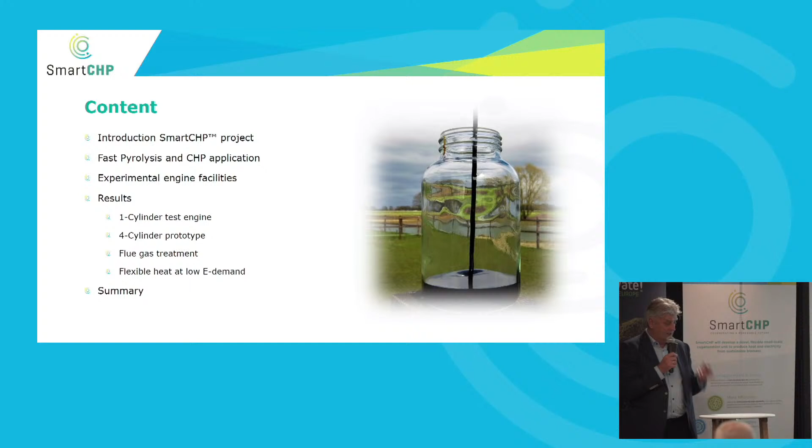So first, a short introduction on SmartCHP. What we would like to develop, and that's in fact the main objective, is to develop a novel, flexible, small-scale cogeneration system. A small scale means, let's say, 100 to 1,000 kilowatt electrical, producing heat and electricity.

What we also realize is that fuel cost is a major cost component in such a system. That's one of the reasons we would like to use untreated fast pyrolysis oil, just crude pyrolysis oil as it is normally produced, and use it directly to minimize fuel cost. This pyrolysis oil is produced from all kinds of different biomass resources. It can be agriculture, it can be woody, etc.

A big advantage is what we use, a so-called compression ignition engine, normally known as a diesel engine. The big advantage there is that you have relatively high efficiencies, and moreover, you can have very fast startup and very fast load changes.

So as mentioned, we foresee commercial application in this range from, let's say, 100 to 1,000 kilowatt. What we also would like to achieve is a high heat to power ratio, or to be very flexible in the output, having more or less heat compared to the electricity.

Well, schematically it's shown here. We start with non-food biomass, RED 2, RED 3 compliant biomass. We make fast pyrolysis oil, and this fast pyrolysis oil, FPBO, is fed to the engine. Of course, we need to modify this engine. Then the flue gas from the engine is sent to a boiler, and we can add some additional pyrolysis oil if needed, if we need more heat.

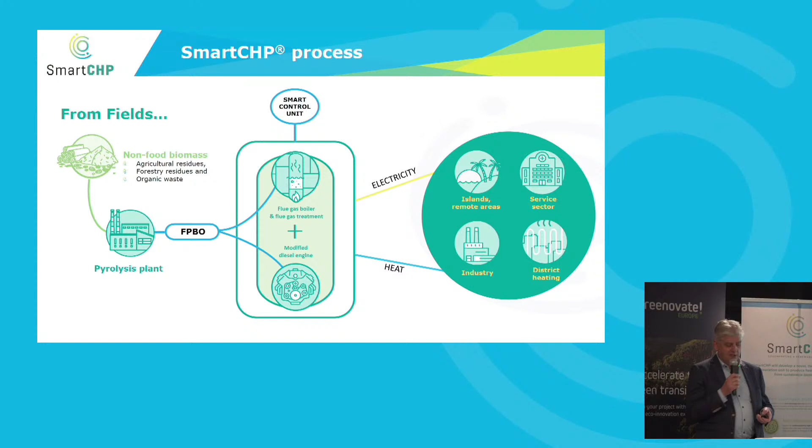That should provide the information for a commercial scale system. Besides the technical aspects, we have some assessments on biomass availability, market assessment, techno-economic assessment, but also sustainability, socio-economics, and policy. That will be covered later in this program.

I will focus more on the development of this prototype.

That's just as an introduction to SmartCHP. We will hear more about it later on. And I would like to continue only with fast pyrolysis and the application of fast pyrolysis oil in the engine.

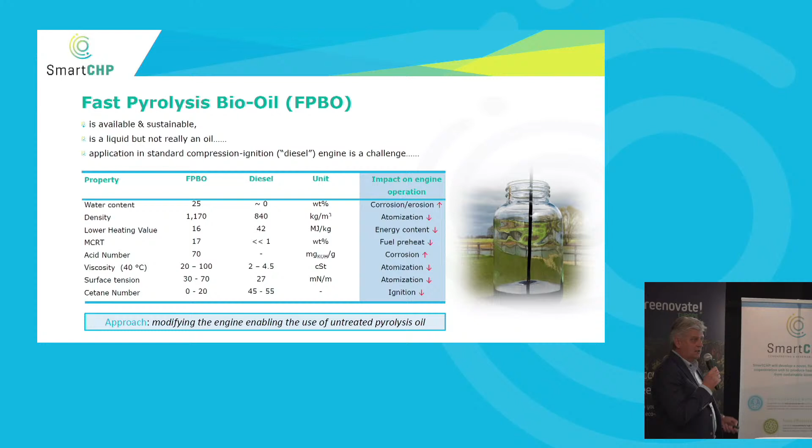So we modified the engine. We have different facilities at BTG, what we call a 1-cylinder research engine and a 4-cylinder prototype. Some properties are given here.

But to be able to run the engine on pyrolysis oil, we need certain modifications. So what we did, we increased the compression ratio, which means a higher temperature at the end of compression, so you can ignite the fuel.

That's also the reason we did some air preheating. If you start with a higher temperature, at the end of compression the temperature will be higher, easier to ignite. We did a little bit of pyrolysis oil preheating to lower the viscosity, but it's limited, otherwise it will polymerize. And a difficult one is having a corrosion-resistant fuel injector to be able to run continuously.

And of course, in the end you need to have low emissions, and that's the reason we added a flue gas treatment. It's a kind of add-on to the system, but it allows us in the end to comply with European emission limits.

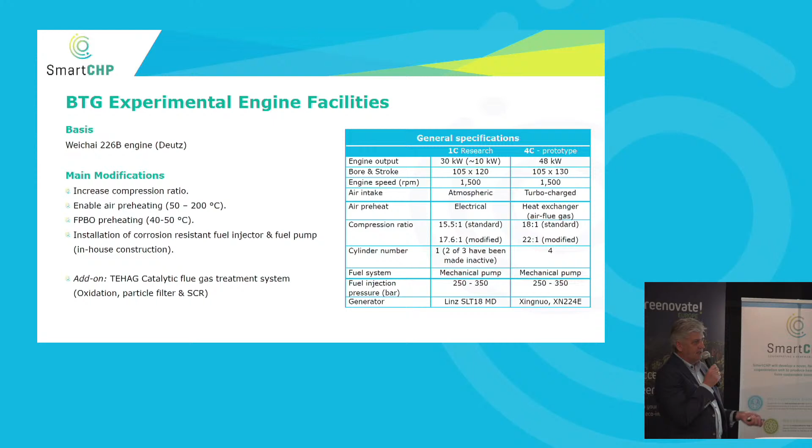This is the 1-cylinder test engine. In fact, it's a 3-cylinder engine, and 2 of them are made inactive, so only 1 is running, and you only have to install one new fuel injector and one modified fuel pump, etc.

We did a lot of experiments. I won't show you all the results of all the experiments. There are some public deliverables explaining more on the results, but of course we looked at different process parameters.

Just looking at the pyrolysis oil, it's not treated. The only thing we do is filtrate it, at least to avoid particles in the oil. Very often we add a little bit of ethanol because that makes life a little easier for us, it's the lowest viscosity and it's easier to feed it. If there's a subscript like 10, it means 10 weight percent of ethanol has been added to the pyrolysis oil.

We looked at different process parameters, and at pyrolysis oil from different resources like pellet crumble, sawdust, miscanthus, olive residue, and also a fraction of pyrolysis oil called pyrolytic sugar. We also used it in the engine.

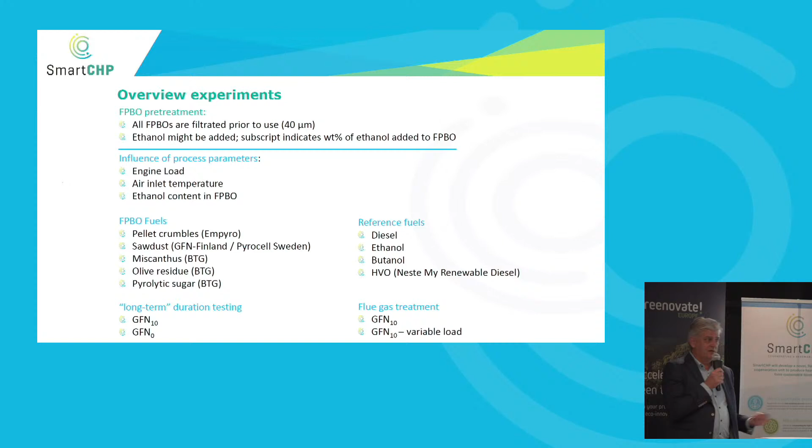And we compared it to reference fuels: diesel, but also ethanol, butanol, and hydrotreated vegetable oil. It's easily available and just for comparison. The long-term testing we did with what we call GFN, the oil from Finland, which we can easily get, so a lot of long-term testing was done with oil from sawdust.

Just some results. What you see here is the different fuels, and these are pyrolysis oils, and these are reference oils. Of course, if you look at the mass of fuel you're injecting, it's much higher with pyrolysis oil because the heating value is much lower. That means you have to inject 2.5 times the mass of diesel, because otherwise you have less energy entering the engine.

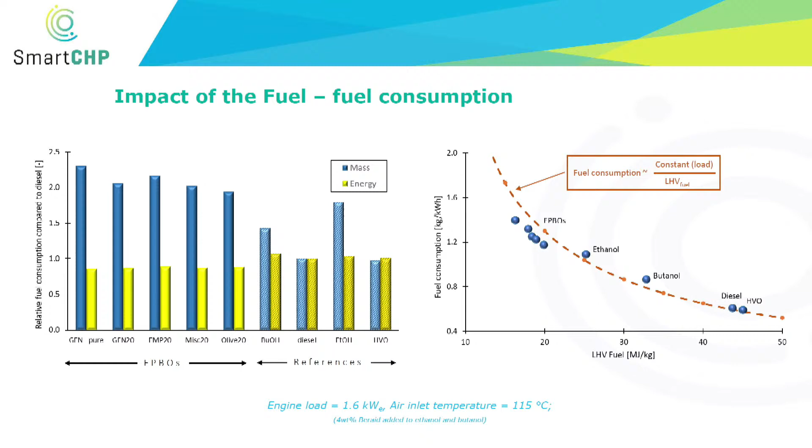So that's quite normal. The same you see for ethanol and butanol, because also the energy content is lower. The yellow one is on an energy basis, and it looks quite nice because diesel is set to 1. If we compare on an energy basis, we consume a little bit less pyrolysis oil. Of course that's very good, but I also have to admit the engine has been optimized for running on pyrolysis oil, so conditions are suboptimal for diesel. But basically it's roughly the same.

And what you see here is what you would expect. If you change the heating value of the fuel, you get this kind of line. The red line means it's the same energy efficiency. But what we see normally is the energy efficiency on pyrolysis oil or diesel is roughly the same.

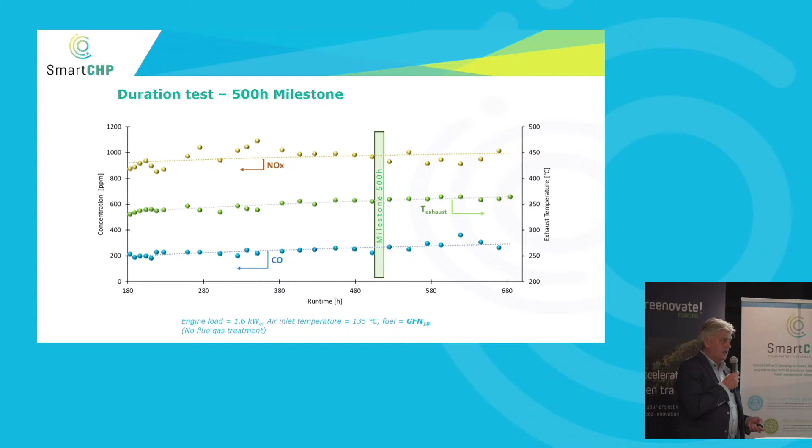We continued this testing also for flue gas treatment, etc. So this injector we used here was operated for more than 1,000 hours on fast pyrolysis oil. I think that's a quite good result, and a major result from this project.

So this is part of the 4-cylinder prototype, the 4C prototype. And this is also the emissions directly after the engine, so without any flue gas treatment. Again, we are just comparing diesel and pyrolysis oil. As said, the 4 cylinders are optimized for running on pyrolysis oil, not optimized for running on diesel.

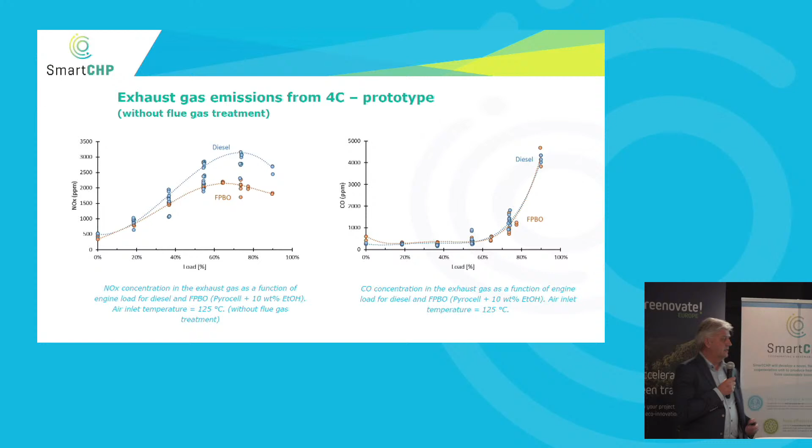Soot emissions we do not really measure directly. What we measure is opacity of the flue gas, and it's a little bit indirect. It's not an absolute guarantee that the particle emissions are very low, but it's the only analysis method we have so far. Actually, at the moment we are trying to do particle measurement, but the results are not yet available. What we see again is that for this engine, this is almost 100%.

The opacity remains very low. It would be an indication that soot emissions are quite low with this system, but it's not a guarantee.

Here again is the electrical efficiency of this engine. According to the engine supplier, it should be 32%. In the project we were hoping for 40%, but if we start with an engine which is designed for 32%, we will not be able to go much higher.

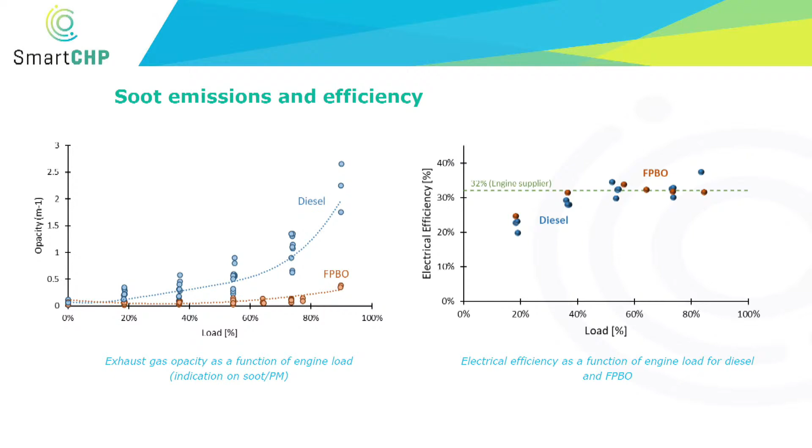What you see here is diesel and pyrolysis oil as a function of the load. We are around 31 to 33%, somewhere in that range, if we run at sufficiently high capacity. I think the conclusion here is that, apart from the absolute value, there is hardly any difference if we run on diesel or pyrolysis oil, and I think that's quite nice, quite good.

Well, of course, as mentioned, the emissions are quite high without any flue gas treatment, so we need a flue gas treatment.

So it's the engine, we have the flue gas, all the measurements so far were from this point. Then we have an oxidation catalyst to get rid of the CO and the hydrocarbons, and it's also a particle filter. After that, AdBlue is injected, the ammonia solution. We have catalytic DeNOx, and then we should have the clean flue gas, at least it should comply with the regulation.

Here you see some results from the 1-cylinder engine at fixed conditions, where we also needed at least 100 hours of operation. This one was running for 150 hours without changing anything. After the start, the red one is CO and the blue one is NOx, both were somewhere in the range of 92 to 96% conversion.

And the emissions are within the limits. We think this system for the 1-cylinder engine, the smallest one from TEHAG, is still a little bit over-designed for our research engine, and that would also result in these very high conversions. But the catalyst remained stable.

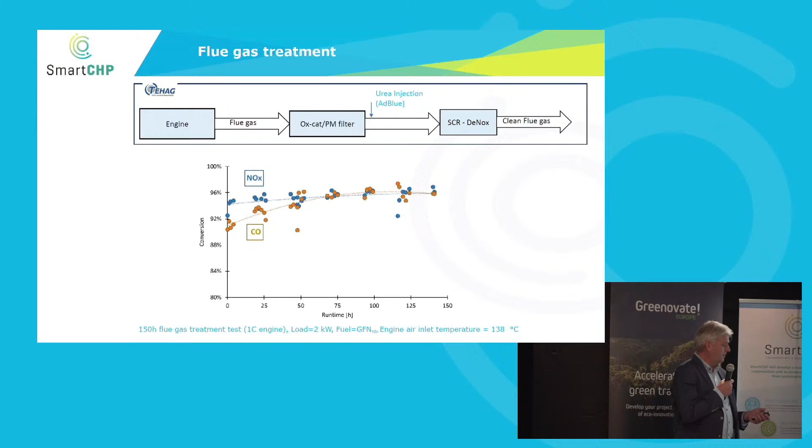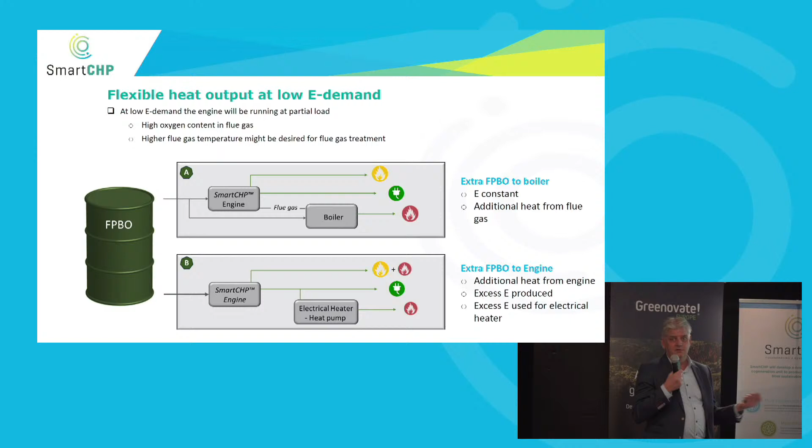What appeared here, and honestly, we're still not 100% able to run the boiler in this setting. It's very unstable, hard to ignite, and so we had a lot of complexity. We're also running the system with electrical heaters, which we have in the lab. It's much easier and simpler to operate, and changes in load or output are much more flexible.

So I think in the end, for the next system to implement, it will probably be more like the electrical heater system than the first boiler-based one. But that's also an outcome of this project.

Anyhow, at OWI in Germany, they were running the boiler standalone with pyrolysis oil. That works, but this combination, this integration, creates a lot of complexity, so that was not fully successful.

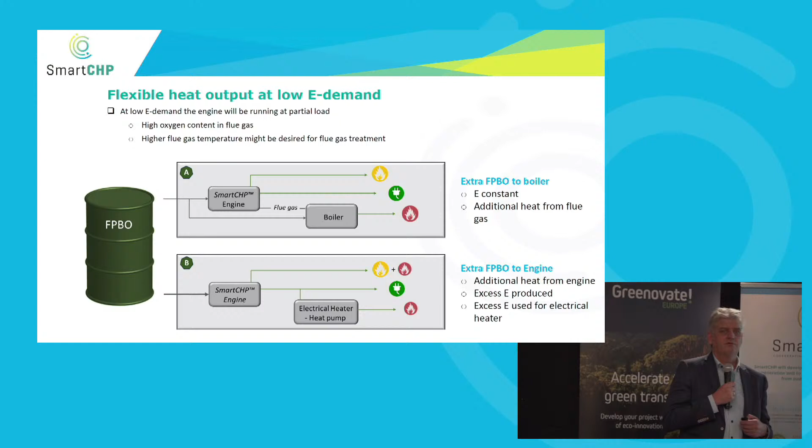To summarize: we were able to modify the combustion engine to really run on pyrolysis oil as a fuel. We also saw that even changing the origin of the pyrolysis oil doesn't have a major impact on running the engine, as long as the oil is more or less homogeneous, or treated. We cannot run it as a two-phase oil.

We ran the one-cylinder engine for more than 1,000 hours, and the prototype for more than 100 hours. We saw very limited fouling, so we were very happy with this pump and injector. The solution we have now does work for this system, and that took quite a while.

Flue gas treatment is effective. At least we can stay within European and Dutch limits, but as mentioned, we did not fully achieve the performance indicators we defined ourselves.

Another point: if you compare diesel and pyrolysis oil, it's very much the same. If you look at electrical efficiency, that's also quite good—in that sense there's no derating. It's just hard to run at 100% engine capacity.

Lastly, from a technical point of view, if you want a high heat-to-power ratio, it's easier to feed the engine with more pyrolysis oil, generating more electricity and using that for heat generation, than injecting pyrolysis oil additionally into the flue gas. That creates a lot of complexity and is difficult to control, so I don't think that's the proper solution in the end.

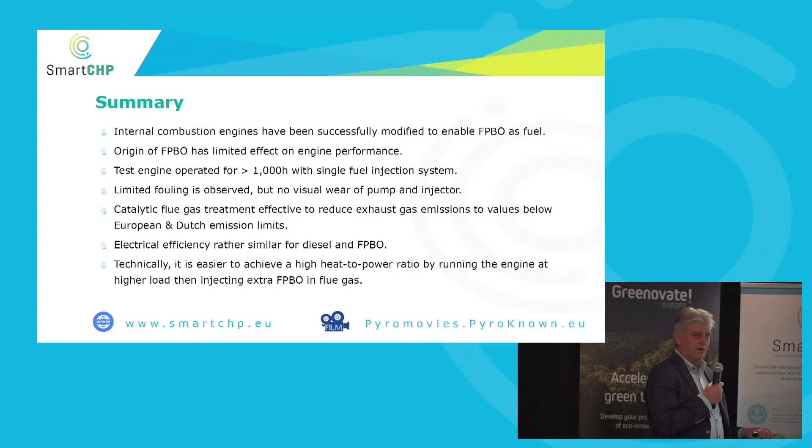There's a website with movies showing the engine running, so you can check that out. And that brings me to the end. Thank you.

More or less, I will talk about the Blaze and UNIFHY project that are similar, with smart CHP, project with different technology, but the things in biomass are more or less similar. First of all, the status of the CHP. There is a status that we have together for the biomass availability, but there is also status on CHP that we checked a little bit together. There is a deliverable in the Blaze and also Smart CHP website that I suggest you read about biomass availability and so on, CHP status.

So more or less, this means that the CHP is mainly done by steam turbine, or combined cycle, at a bigger size, not at this scale of a Smart CHP. There are also small operating hours, 3,000 operating hours electrical and 2,500 thermal. So also this is not enough. I want to do a high efficiency, I want to make a better efficiency use of my energy. And after, I have to plan to have a system that is operating more than 3,000 per year. So this is also an issue. The cogeneration electrical now is on average 40% electrical and thermal, so there is more thermal needs. It's mainly used for space heating, process heating.

Okay, and we saw the countries now that use mainly CHP. And in smart CHP, you see the countries use mainly biomass. Always Germany, Italy, UK, Sweden use biomass.

Instead, here are countries that use mainly CHP and biomass. Poland also uses CHP, and of course there is also Netherlands among the others.

So this is more or less regarding the fuel, mainly used natural gas, but biomass is increasing. So there is a lot of use of biomass for CHP. Below 1 megawatt electric, mainly biomass combustors are used.

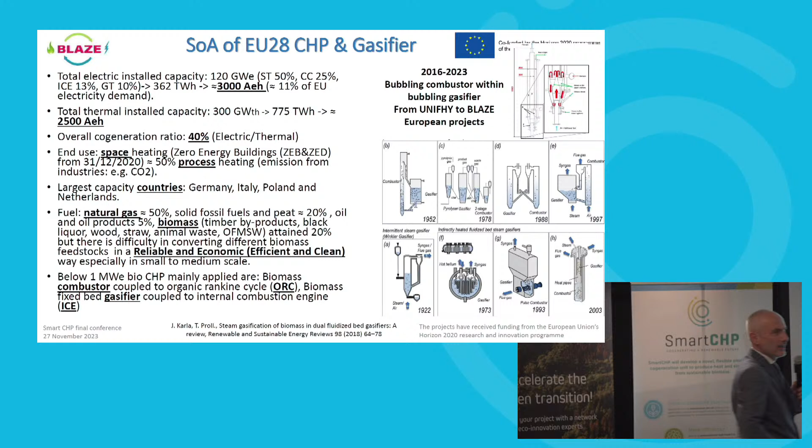That for us is more compact, in order to allow the application of the reactor for small to medium sites. So there is the idea of this biomass, low-cost, advanced zero emission, small to medium scale integrated gasifier, fuel cell, combined heat and power plant.

And here instead we always use waste biomass. We use this double bubbling gasifier. We produce a syngas to send to the SOFC, to produce heat and electricity, more or less.

So there is also the problem that maybe for industrial use we can increase the annual operating electrical and thermal operating hours. That is good. We can arrive at 7,000 hours.

If you have some industry that uses continuous electric and heat, but of course here the price is a little bit low, and there is also the problem of the price of the feedstock.

The feedstock price is not 60, 100, but we saw in these days also 300 euros per ton in the past months, when there was the war in Ukraine.

So, what is the target of Blaze? To reach 90%. So with the SOFC, instead of internal combustion, we can also reach maybe 50% efficiency, overall efficiency. The SOFC also has a greater stack efficiency.

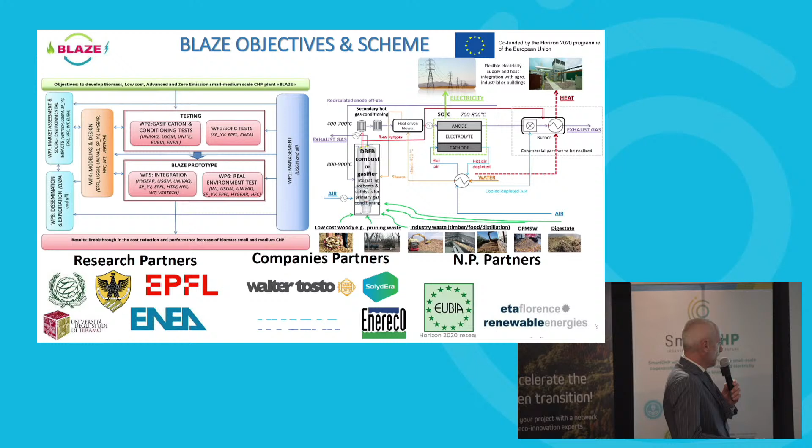Also here there are some partners, research centers and companies, from some European countries. And also here we have some categories of feedstock.

We are mainly interested in gasification, and so it is most important to consider the ash melting point, in the reactor, in order that it doesn't melt in the reactor.

So there is also, if you see the Blaze Deliverables that are open, you find all this data regarding all the different melting point temperatures for the different feedstocks that we checked.

Of course, there is the problem of the cost that we checked, also in order to harvest this biomass, because with the Smart CHP you also have a good option.

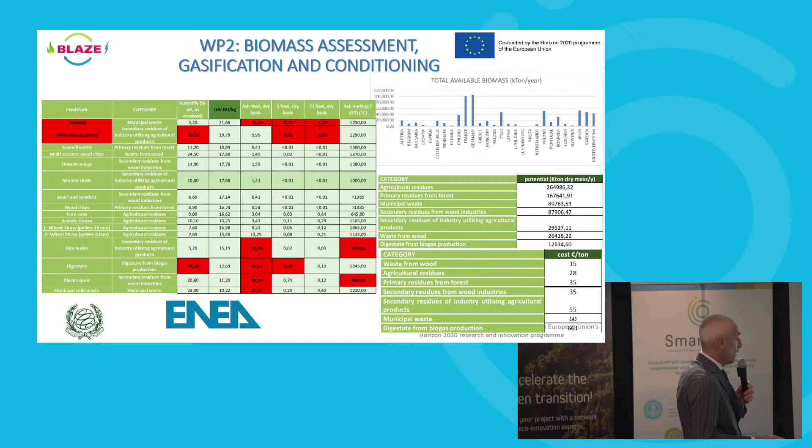Instead of having one big plant where all the biomass arrives, and then sending the pyrolysis oil to the small CHP, here instead we have to take all the biomass to the gasifier.

After, there are results about the primary conditioning, the conditions we find within the reactor, mainly made by, for example, calcinated dolomite, olivine, and so on, in order to decrease contaminants.

This is the lab of Enea, and there are results about the decrease in contaminants for this primary conditioning, using instead of natural sand also calcinated dolomite and olivine.

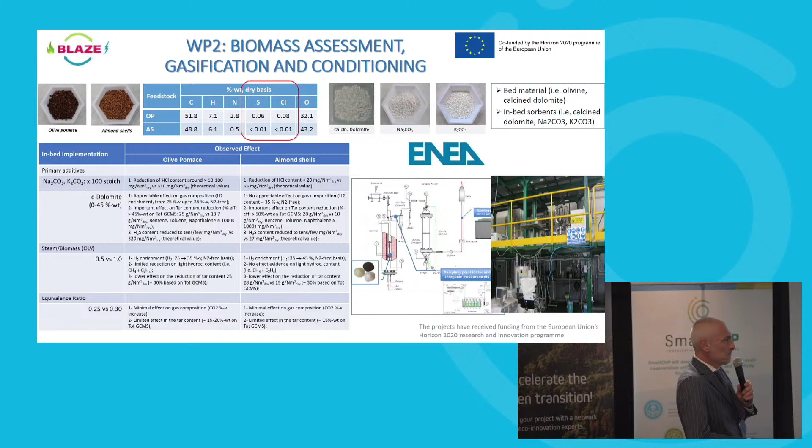The best result is around 50%, an additional percentage of decrease.

Also, we put here catalysts inside the filter candles, ceramic filter candles. This is a lab scale setup, in order to decrease the content of tar and to avoid particulate emissions. These are the results.

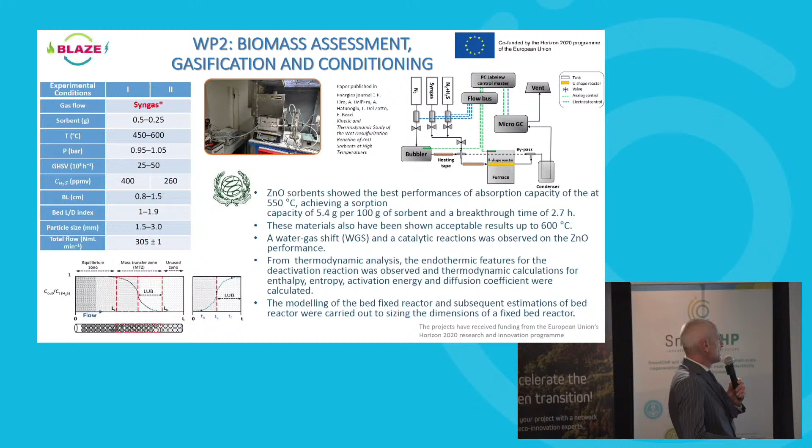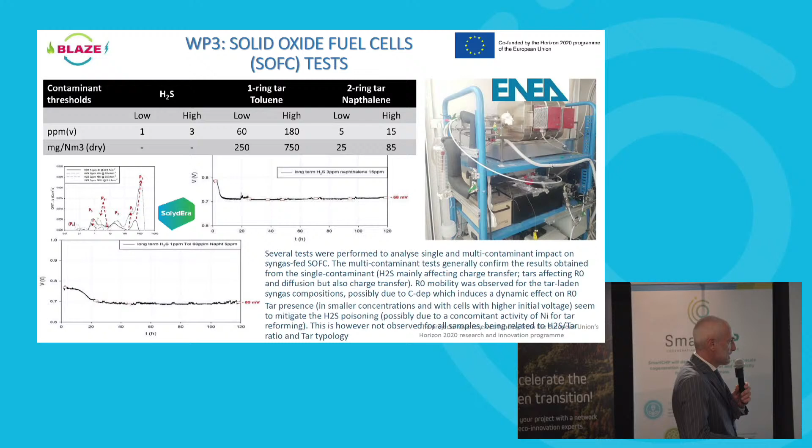Work package 3 is the solid oxide fuel cell. There are many tests on the button cell, a few centimeters of cell, in order to understand the process and what happens to the different contaminants. We send hydrogen first, with a blank, in order to understand, then we send CO, then CO2, then CH4, and then together, to arrive at the different syngas evaluations composed of hydrogen, CO, CO2, CH4. We also take two tar representatives, toluene and naphthalene, as the target.

More importantly, different analyses were made by EPFL within the stack. Within the stack we arrived at more than 2,000 to 22,500 hours of operation. For example, with ppm of H2S, we had 3,700 hours of operation, and also with toluene and naphthalene and so on, and with HCl, we saw some phenomena that are also different from the button cell to the stack. But in general, we found the right limits for the ppm of H2S and HCl, and so we dimensioned the hot gas temperature sorbent for that.

Regarding modeling activity, we modeled in CFD the double bubbling gasifier, and we modeled in CFD the filter with the catalytic filter candle. The problem is we also need to push the gas—it's not an internal combustion engine, so we need to push the gas. In order to do that, we had to develop a steam-driven blower to push the gas without oil, with the gas sealing here and here—a complicated blower.

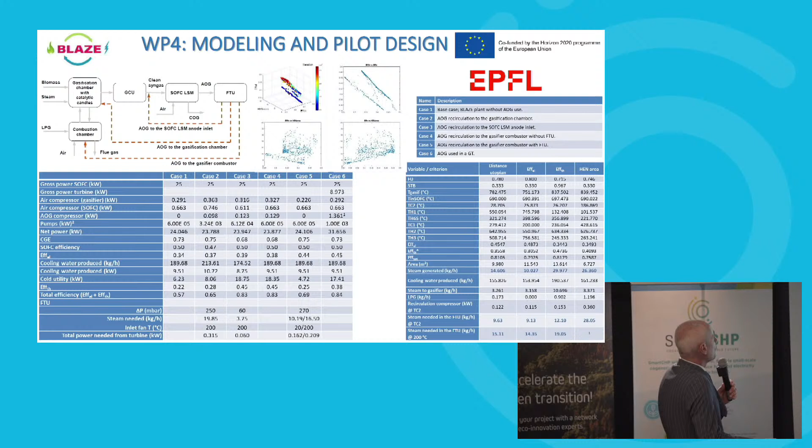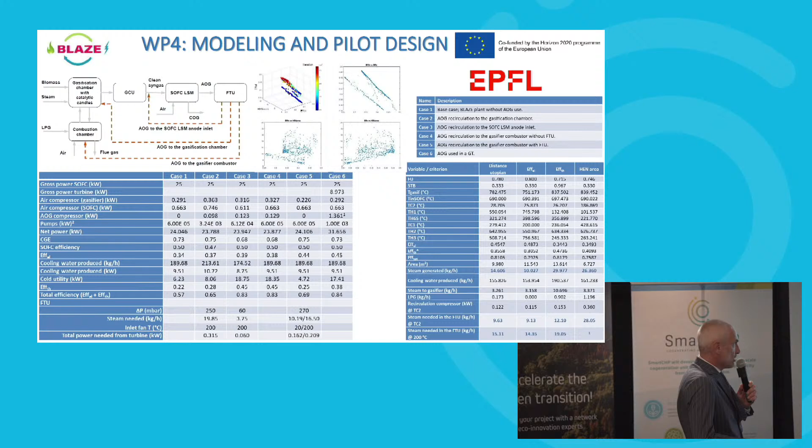Regarding the modeling, we had more or less 40,000 configurations in Aspen. We did a Pareto analysis of the different types of configurations to understand what could work, considering only 3 main operation modes of the plant. We analyzed that the anode off-gas to the gasifier combustor was the best one; the others were not good. But these are just 3 main options—there's a very different combination of heat exchangers and different flows that can be managed and configured. So we had more than 40,000 configurations analyzed, taking into account the best electric efficiency, thermal efficiency, and heat exchanger network, with reduced heat exchanger network area.

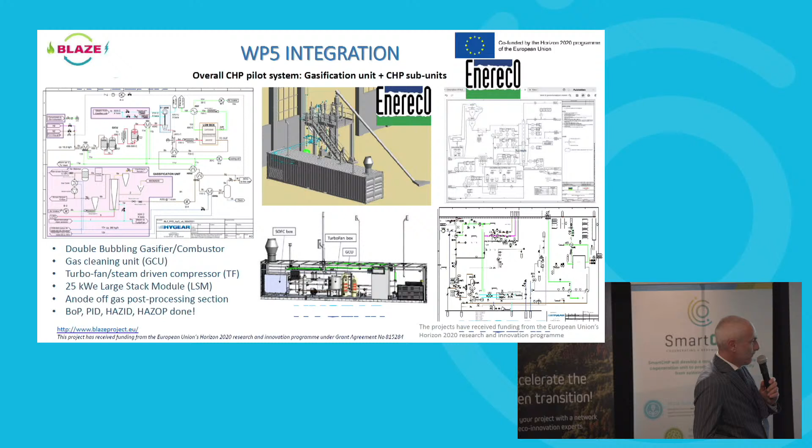So after the 40,000 model analyses of different possible plant processes, we chose one plant to build. In this plant we made more than hundreds of P&IDs in order to control the overall system—mainly the one regarding the gasifier, and the one regarding hot gas conditioning.

So we built the plant: a 100 kilowatt gasifier with 25 kilowatt SOFC instead of 50, because SolydEra was made at 25, and we tested at 25. We operated the gasifier really stable, with good temperature and good hydrogen composition, and we also had better composition for the hot gas conditioning—this is more or less the summary.

There is also the techno-economic, social, and environmental assessment. Regarding that, we need first, for example, the solid oxide fuel cell costs to decrease—they have to go down to 4,000 euros per kilowatt, otherwise it's not possible to convenient apply the plant.

This is mainly regarding the capex. Of course, there are some things that start also from the model analysis of different configurations, so we don't have to use additional fuel. We have to use the off-gas directly in the combustion in order to not have additional fuel, and we have to have very good heat integration.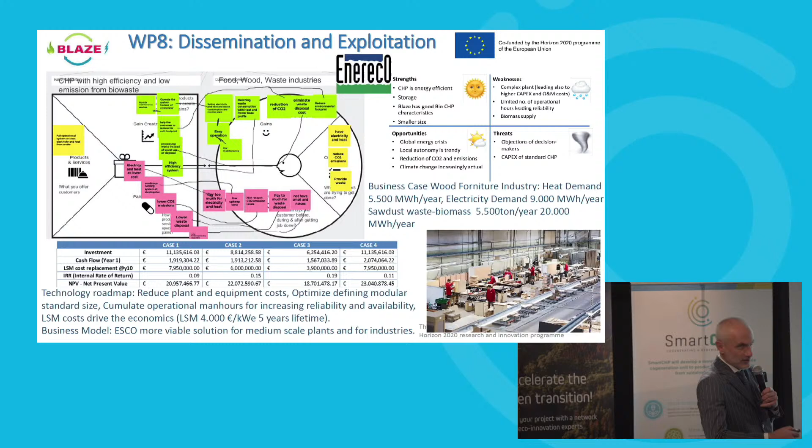This is with a large stack model of the SOFC: 5 years lifetime and 4,000 euro per kilowatt. That is more or less double what we had in the project, so these are half the costs that we had in the project, more or less. This is more or less the situation.

Regarding dissemination, we disseminated together now in the European Biomass Conference with SmartCHP. We created together Cogeneration 2030. Okay, thank you.

I was thinking maybe we can see if there are any questions on Blaze before going to Sophie, so we don't mix the two projects. Are there any questions on Blaze?

I was just wondering, you built the integrated system, gasifier and solid oxide, and there was one result, but how many hours did you operate the overall system in total? The overall system, zero hours - few hours, okay so the overall system we operated zero hours. The gasifier was operated for 2 years, so more or less 8,000 hours, the gasifier.

The conditioning was operated for hundreds of hours and so on. The solid oxide fuel cell we never operated, mainly because we don't have a second extension. We asked for a second extension, and there is Jan Peter from SolydEra that is very worried about his 300,000 euro fuel cell - it doesn't want to feed the syngas if it's not really clean.

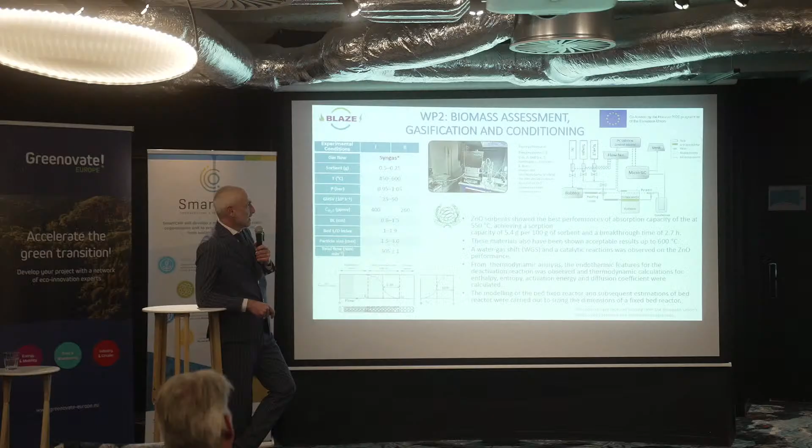This is easy to understand. The solid oxide fuel cell, instead of an internal combustion engine, can arrive at more than 50% electric efficiency. Our model said that we can arrive in our configuration at 49% electric efficiency. So this means first of all you have better electric efficiency, second you have a stable operation, no emissions, and no movement in the system. Of course this is good.

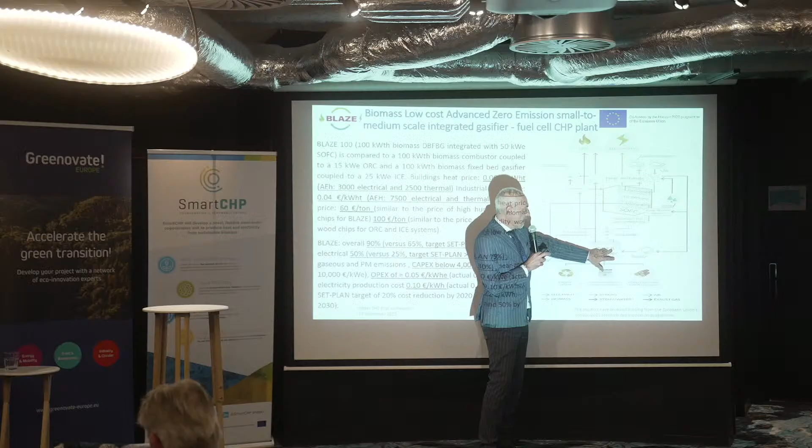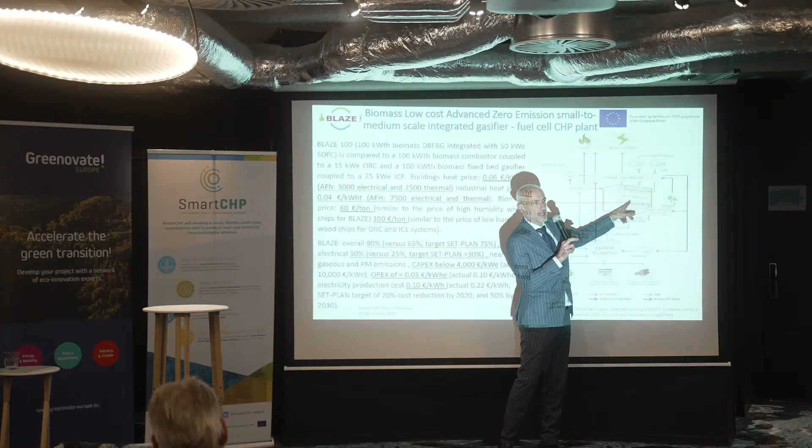But the problem is that it's not catalytic, so it's a very complicated system. You have two reactors that cannot upset any kind of millibar of pressure, otherwise the syngas will go into the flue gas, and the flue gas goes into the syngas. There's a balance of material here, and there's a membrane, a nanostructured membrane, that cannot upset a difference of millibar.

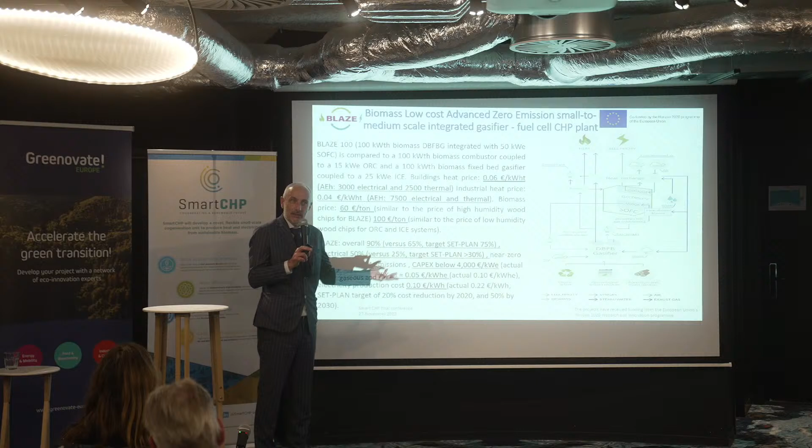The poisoning threshold is 1 ppm of H2S, for example, and this means we need very low contaminants. So why we try to use solid oxide fuel cell, I think it's easy to understand: higher efficiency, less contaminants, less emission, stable operation with no components in movement, and so on. After that, how you can feed this kind of system not with natural gas or pure hydrogen but with syngas, this is another matter.

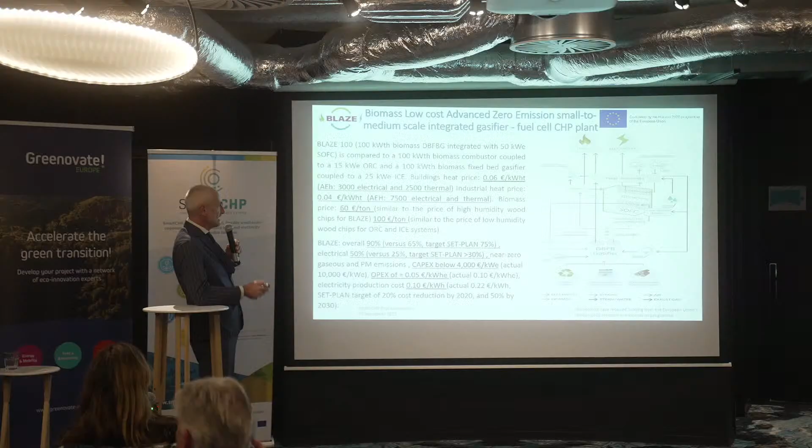Maybe with a double bed gasifier that you couple to a solid oxide fuel cell. But I think at least we arrive to define the system and to build the system. This is the good thing. And to understand what kind of price we need for the solid oxide fuel cell to be commercial.

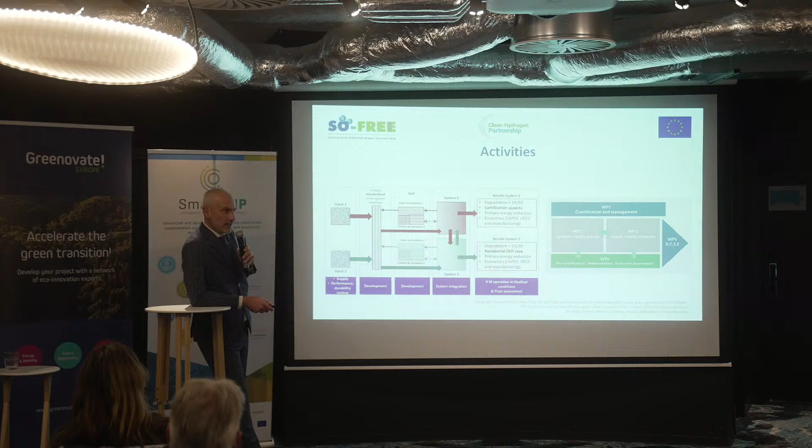So if I have different stacks that work at different temperatures of the solid oxide, and if I have different fuel - pure hydrogen, pure methane, different percentages between hydrogen and methane - I can always operate the different solid oxide fuel cell. This is in realization now, the system manufacturing by ICI Caldaie. So we concluded the stack test, developed the common stack interface, and we are building the system. This system will be applied in different locations, exchanging the stack. More or less, this is being concluded.

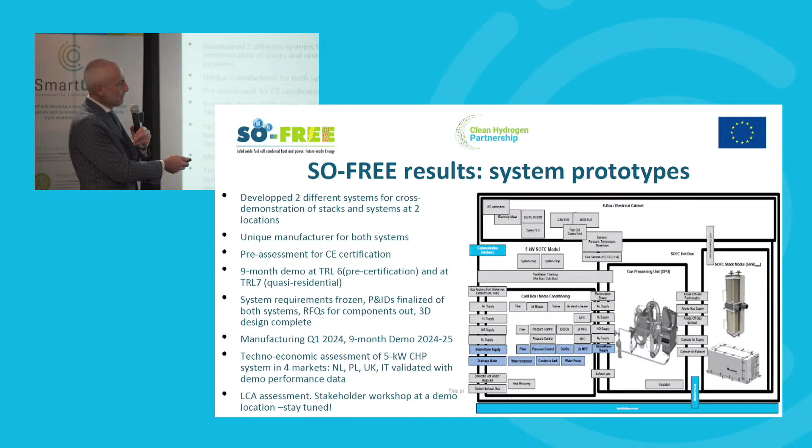This is interesting to understand: the stack is a cost, but also the system integration is a cost. Being able to realize a system integration that can operate different fuels can allow implementing this heat and power. It's like, as an alternative, it's more difficult - with my gasifier I can put anything because I have a conditioning system that is always good and sends the good things onward. Here of course it's easier because there is hydrogen and methane, easier to do, but it's almost the same thing.

Another project I would like to show is where we always try to use this biomass, but for example go into negative emission, and so apply also carbon capture.

And of course all this kind of project we have to think about. I like to show this slide because I always talk about this slide for the ETIP bioenergy, and I also show it in the strategic technology group, because this slide tells us that we have to work on the intermediate solid bioenergy carriers, in order to develop legislation that is missing, and also a market for this kind of solid bioenergy carrier. And also we have to develop a market for intermediate, for us, gaseous bioenergy carrier. This means that these kinds of things are integrated: CHP, biofuel, biorefinery, biochemicals are all integrated.

So it's very hard, for example, to respect a target of 35 euro per megawatt hour of methanol biofuel production, or 100 euro per megawatt hour of electricity, when you start from, for example, 30 euro per megawatt hour of a fuel. That is difficult to transfer and so on.

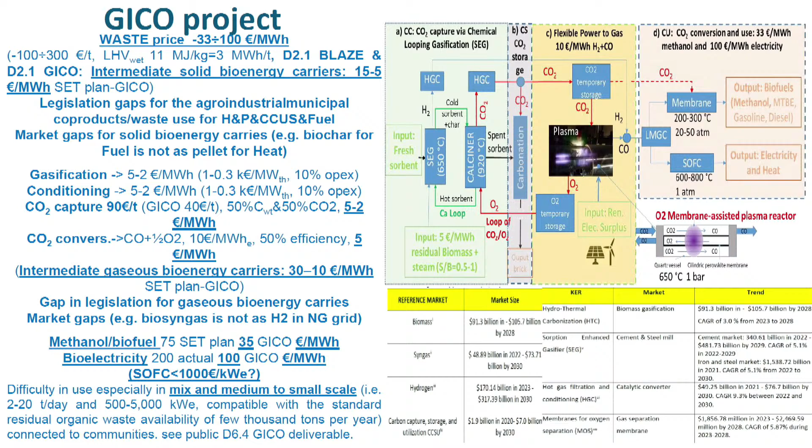And so we need, as the SmartCHP project says, a common goal that we have together. For example, BLAZE and GICO and also SmartCHP, in order to develop this gap in legislation, to go ahead with developing a market where this kind of solid, gaseous, and liquid bioenergy carrier can be the mainstream for new chemistry, and also give sustainable CHP production and biofuel production.

Thank you. Thank you so much, Enrico.

We still have a few minutes for questions also for the last two projects. Yes, please, introduce yourself. I'm Michel Delanaye from Fit4Micro and MITIS.

So a question, in SO-FREE as you said you're comparing two stacks. So Cogen and IKTS from Fraunhofer Institute, the other one. And do you see big differences actually in terms of behavior of the two stacks up to now?

Yes. No, the solid oxide fuel cell - sometimes the production is still quite not so industrial. It's not like, for example, alkaline electrolyzer or PEM, where you see almost industrial production. So still here we are at a few pieces a year. Fraunhofer is a little bit more advanced, and they've already developed facilities in order to have 1,000 pieces per year, mainly due to selling to companies. They sell to companies that want to develop this kind of technology, and so it's a little bit more standardized, and the performance is a little bit more steady.

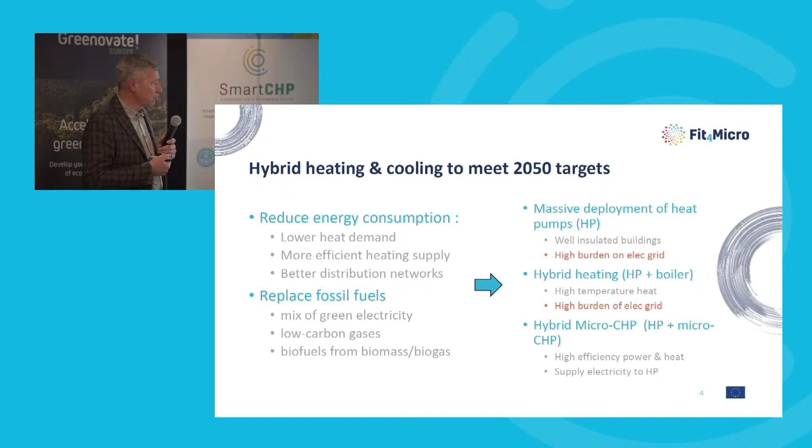The idea here is that we localize power generation, heat production, and cooling locally into the building. If you produce your own electricity with a certain type of fuel, you decrease the requirement on the grid, letting other people with very good insulation use the heat pump instead. So you want very high efficient power and heat - this is also the idea of the SmartCHP project, to some extent, and of the other project that was proposed. We are talking about decentralized power generation with renewable fuels, basically.

And so in the project, what we are doing, we at MITIS are developing microturbines, so we don't develop ICE. We would like to go to SOFC, but that's going to be in the future. But we are working on microturbines, and the idea is to build what we call a hybrid microturbine.

Hybrid in the sense that it's going to be coupled with other types of systems, mainly heat pumps. This hybrid system we'll use for heating, cooling, and power, working on renewable energy. At the end, you want something you can deploy that produces high comfort levels to everyone, and that is not too expensive. That's going to be in our KPIs, which I will not recall, not to kill all the audience. Also with the penetration of renewables at the household level, which is very limited for the moment.

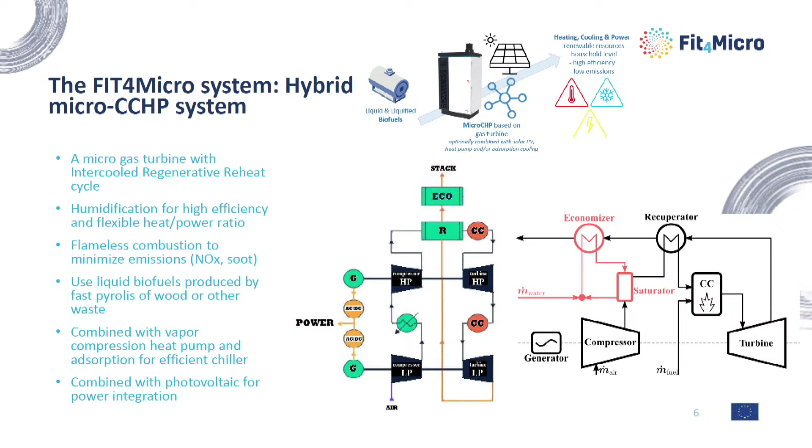Another aspect that is interesting with microturbines, which you don't find in ICE, is the possibility to implement gas foil bearings, as you mentioned for your small blower. We implement this here too, so we have no oil in the system. For small systems like 20 kilowatt, 30 kilowatt, or even lower, it's hard to think you can have oil in your system, because that produces a lot of problems in terms of maintenance. What you want, if we distribute these systems in a lot of buildings, is the same maintenance time as a boiler.

A boiler requires maintenance at minimum once a year, and you don't want to maintain it more frequently than that. So that's why we implement a system with no oil basically in it. Very importantly, we have the liquid biofuel aspect, which comes from fast pyrolysis.

This is somehow a continuation of the SmartCHP project, but for microturbines. I'll explain a little later if I have time.

Then we combine this with a vapor heat pump. Same idea as what Bert presented: if you have too much electricity and want more heat, just put it into a heat pump. You get more heat in that case, to do cooling as well, and also to use it for adsorption for an efficient chiller.

One problem with CHP is that in summer you turn it off, and if you turn it off, your return on investment becomes not so good. So what you would like is to use the system all the time, and coupling the exhaust heat into an absorption chiller actually helps improve your return on investment.

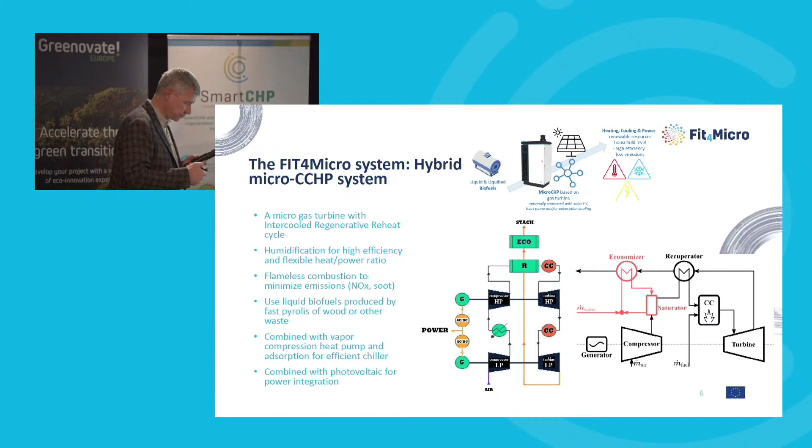The impact here is that we want to increase the technical performance, robustness, viability, and penetration of renewables thanks to these liquid fuels. In some ways we are targeting buildings that are not connected to the grid and cannot get green biomethane in the future, so they need something else, they need liquid fuels.

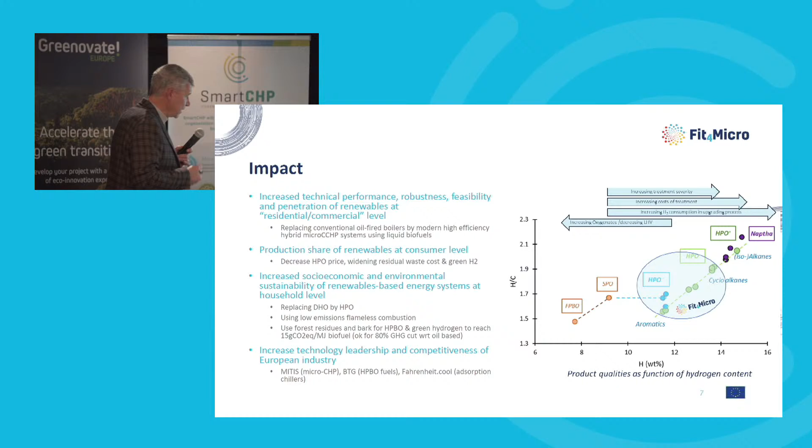So we need to do something on the price, and also on the adoption of this kind of technology. And hopefully, through this project, we can also increase our leadership—us, BTG, and Fahrenheit.

So I will skip ahead. In the project we have 8 work packages: 4 technical ones, which go from the improvement of biofuel production in terms of cost, but also in terms of nitrogen content in the fuel, which is responsible for NOx production through fuel burning, plus combustion research and improvement of a flameless combustor for these kinds of fuels.

Then we work on the microgas turbine and humidification, and then we move to the hybrid system where we combine everything together. This is, of course, surrounded by the management work, dissemination and communication.

We also do an LCA analysis of the whole system and its impact in terms of gender and the general public, as well as everything related to policy, because a lot of things are moving today and it's very difficult to keep up with all the legislation.

The project is now 1 year in, so we have some few results. It's very limited what I'm going to present because my time is limited, but Bert would do it much better than me.

So this is basically the process of producing the HPO. We can have HPO with different qualities, and of course the lower the quality, the lower the cost, which is actually better for distributing it to households. So we want to investigate which quality we actually need for implementing this system.

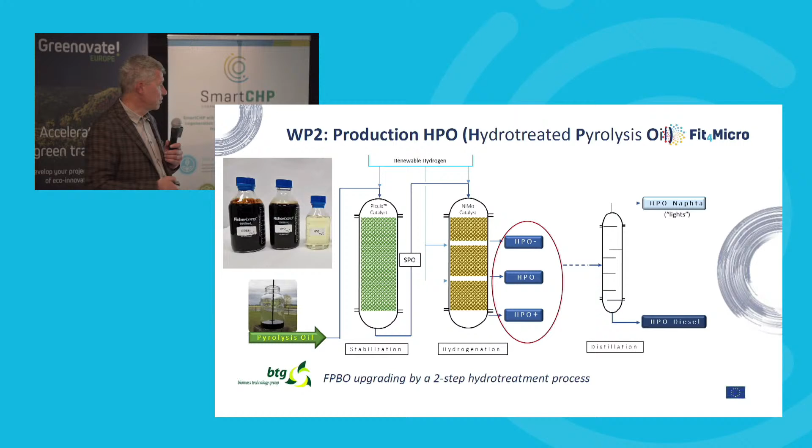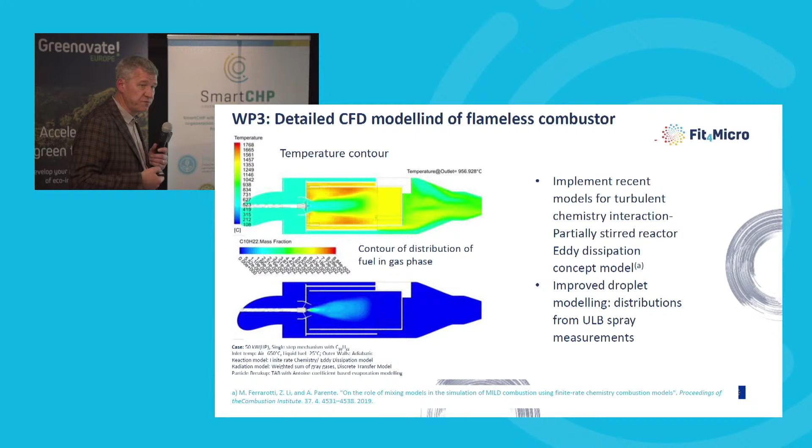In work package 3, we are working on these combustors. This is a sketch of our combustor where, for example, here it's temperature, and you have no flame per se. The combustion is taking place here, and it's very funny experimentally, because when you start the machine, you hear the normal burner, but as soon as you move to flameless, you think it's all extinguished, but it's still burning. Don't put your hand on it.

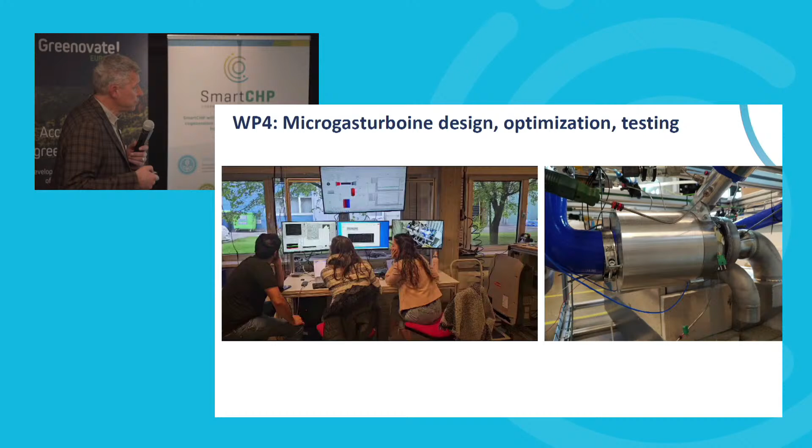So that's our microgas turbine test rig, we are testing it. For the moment, that's basically the core of it. This is the turbo generator, operating at 100,000 RPM on airfoil bearings. On one side you have the turbine, at 950 degrees C, and about 60 millimeters on the left you have the compressor, operating at 120 degrees C. All of this is without any oil, and your shaft is levitating in the air, which is very interesting.

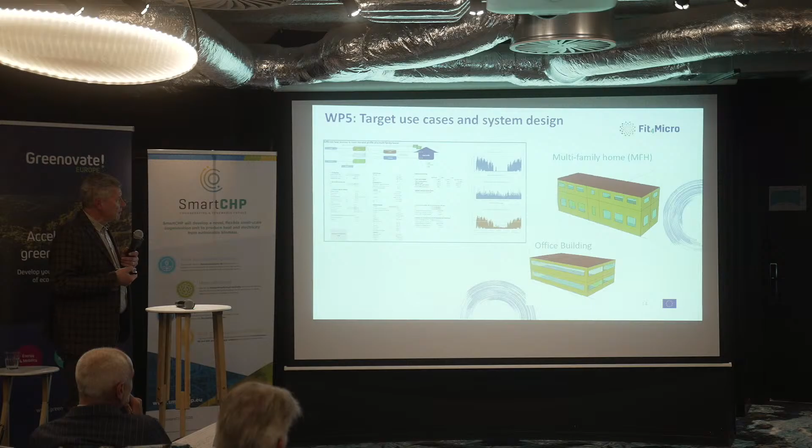So Fraunhofer and some colleagues are working on where we should actually apply this machine. This was a big thing in our project, important for selling it afterwards. What kind of building? We've been looking at multi-family homes in different parts of Europe. Of course it's easier to use in Finland than in Cyprus because of the heat. Where you have more heat, it's better.

So we are trying to narrow down where we can apply it as much as we can, knowing that these systems would be super nice if combined with district heating, because it doesn't care which building you supply the heat to. You put the machine into a building, it produces electricity for the building, and the heat you dump into the district heating and use it a little further. This is really great, in fact.

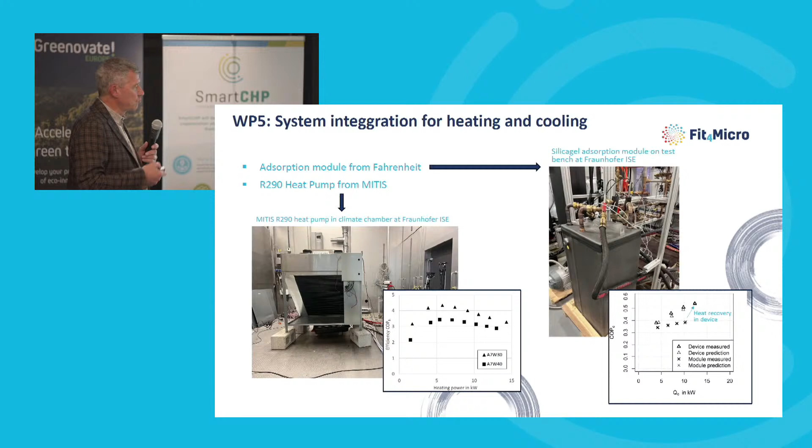So the Fraunhofer people are also working on our heat pump, the MITIS heat pump. It's an R290 propane heat pump test bench that we developed in an EIC accelerator project, testing it to see what kind of performance we can get out of it. It's also very tunable, so they like it very much. And they're also working on an adsorption chiller from Fahrenheit with different types of adsorbent inside.

LCA analysis is performed by the Danish university, and we had already a workshop on gender impact. For us engineers, it's very strange, but it was very interesting in fact at the end. Another important work package is the policy assessment, and there are new policies in the eco-design of buildings which might not be so interesting for micro-CHP. So we want to see the impact of that legislation on the labeling, for example, of our machine.

And the same thing with regard to the way you actually define bioenergy at the European level. What is renewable energy? Is our biofuel still considered renewable energy in the future? Cogen Europe is actually providing all of this insight to us, and it's really interesting.

So we've been doing a lot of dissemination. I'm happy to be here, but I've also been in Dubai, Singapore and other places. We've been quite active sending a message all over the world about what we are doing. We have a bunch of new meetings coming up, including EUBCE in Marseille, but also Turbo Expo, which is very important for us, in London next year. I will also be in Enlight in Paris tomorrow to give a little word for Fit4Micro. Thanks a lot.

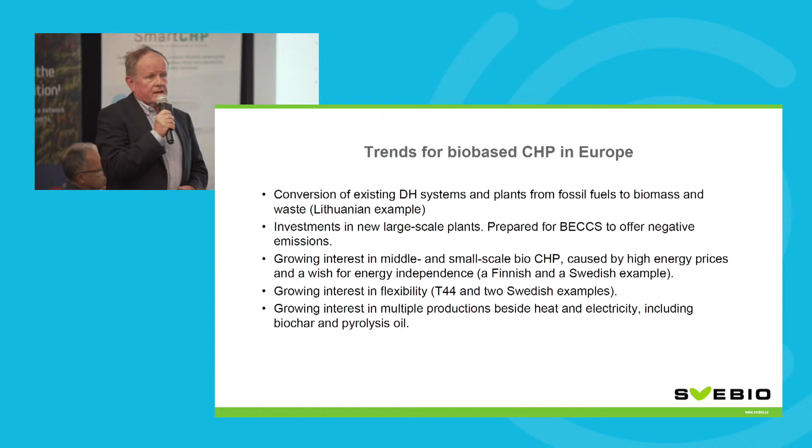And finally, what you have also been talking about a bit before the coffee break is to use these installations not only for production of heat and electricity, but also for production of chemicals, biochar, biocoal, or pyrolysis oil, or whatever - and then try to find optimal solutions for this.

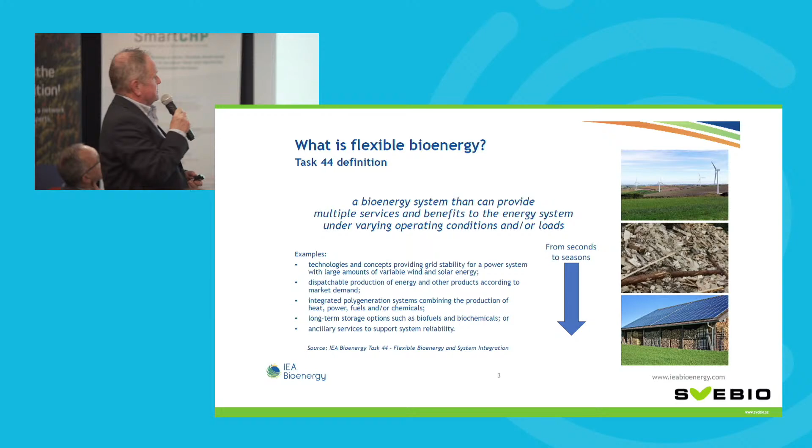So what do we mean with flexible bioenergy? This is a slide from T44, Task 44. The definition is that it is a bioenergy system that can provide multiple services and benefits to the energy system under varying operating conditions and or loads. And we give a number of examples there.

It is, for example, technologies and concepts that can provide grid stability. It's dispatchable production of energy and other products according to market demand. Also here we talk about polygeneration and long-term storage options such as biofuels and biochemicals. And this is the major advantage, as I see it, with bioenergy compared to other renewable energy sources: both our fuels and our products, intermediate and final, are storable. We have the energy storage in the system itself. This is very different from, for example, wind power, where you need to produce hydrogen or a battery to store energy.

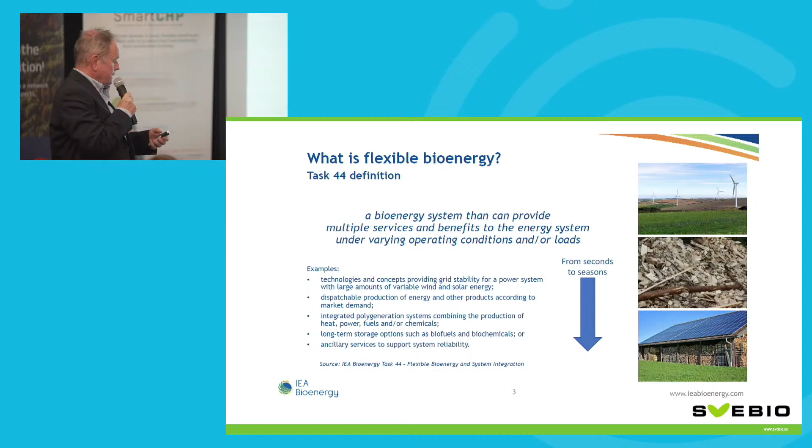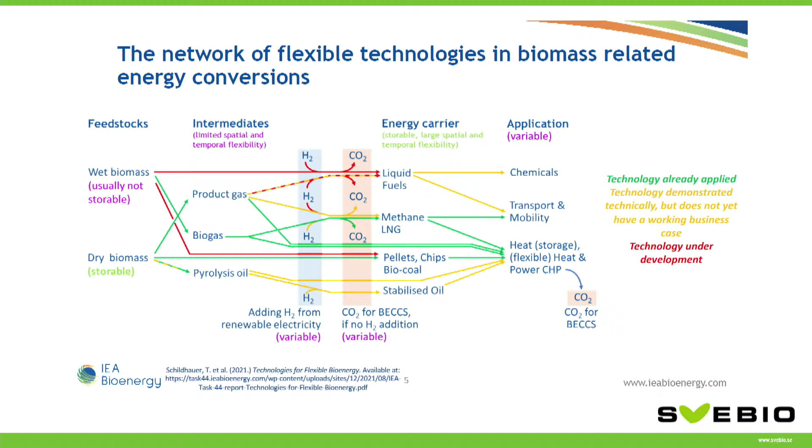You don't need to look into detail on this one. We have seen many detailed slides already, but this is the only complicated one of mine. I think the interesting message is that bioenergy is not simple, the same way as wind power or solar. You have one type of conversion for wind, a three-winged wind tower or generator, and it produces electricity. It's simple. But in the bioenergy case, you have multiple paths or solutions, multiple different biomasses, wet and dry and liquid, and then you produce a number of intermediate products. You can add hydrogen, and so forth, and at the end you have multiple applications to use in transport, industry, heating, or power production. So it's a complex system where you have to take advantage of the specific advantages of bioenergy and try to find solutions that are economic, of course. That's the most important thing. They have to work on the market.

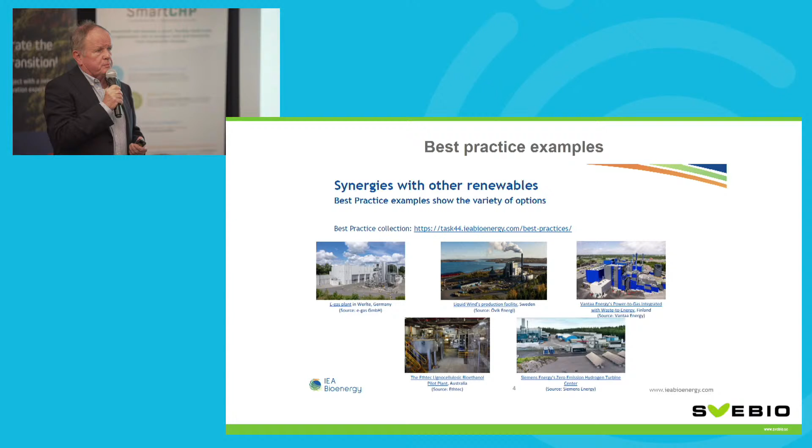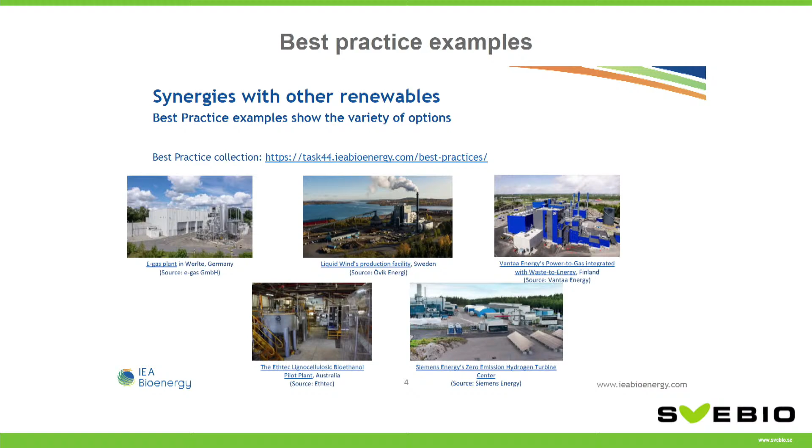One thing we do in T44 is publish best practice examples on our website, and I am leader of that group in the task. I must tell you, it's not so easy to find simple examples of good flexibility that have been demonstrated on the market and that work well there. I invite you, from these projects we've heard about here before, the day you have something up and running that is commercial and can be shown on the market, come to us and we will publish it on our website. But we see very little that is advanced enough and already up and running.

But we see a lot of examples of more conventional technology showing that bioenergy offers flexibility services to the markets. We already have that, of course — CHP in itself is a good example. But here we have some examples. We have liquid wind production in Sweden, where they are now going to produce an e-fuel from carbon dioxide recovered from a regular CHP plant, then add renewable hydrogen and so forth, producing probably a fuel for maritime purposes. We see several such projects around Europe.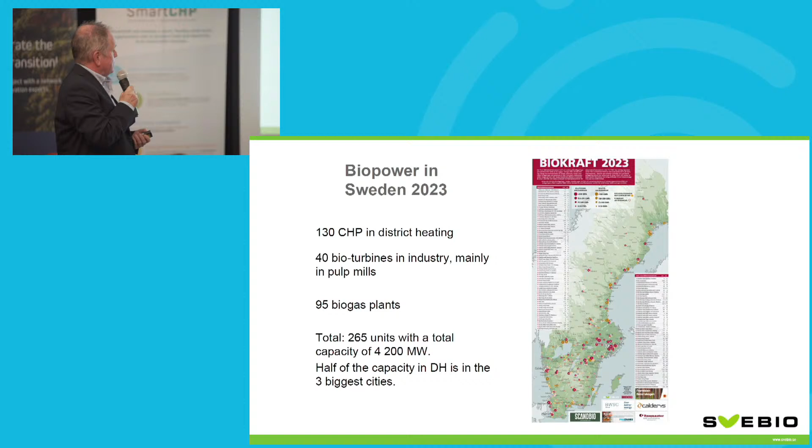This is biopower in Sweden. We produce every year an updated map of all installations of power production from biomass. Today we have 265 units with a total capacity of about 4 gigawatts. Half of the capacity is actually in the biggest cities in Sweden — Stockholm, Gothenburg and Malmö. Much of it is based on waste, but most is forest residues or residues from the forest industry, and many are also turbines in the pulp mills. We have 95 biogas plants that produce electricity, which is the first step of small-scale biopower production, also rather widespread throughout Europe, particularly in Germany and some other countries. This is the Lithuanian example I talked about before.

I saw on some slide numbers from 2017, which is quite a few years ago. Well, that was when the work was done, when you picked the numbers from Eurostat. But at that time, Lithuania still had quite a lot of Russian Gazprom gas. And this slide only goes to 2020. If we had taken another 2-3 years until the current data, there would be practically no natural gas left in the system.

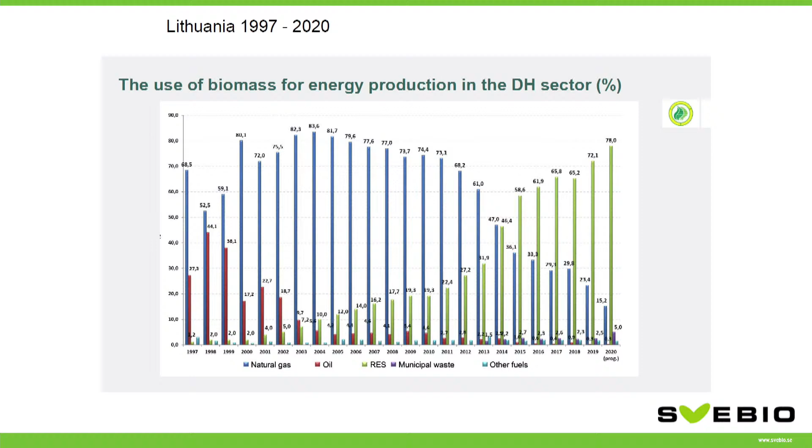So you can see the total transition here between 2012 and let's say 2020, where biomass and municipal waste took over the whole district heating system in Lithuania. Actually, as late as this summer, I think they inaugurated another big CHP in Vilnius for biomass. So they have done that totally, and they have had no problem finding sustainable biomass.

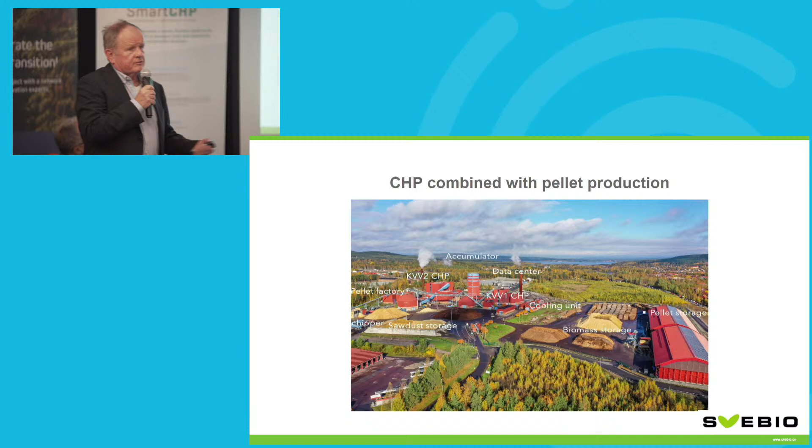This is a good example of one of these multi-purpose CHPs, which has been around for quite a few years. It's in Falun, a city of about 40,000 people in central Sweden. They have added a pellet factory to the CHP, so they produce power, heat, and pellets. The reason for the pellet factory is that they can extend the heat load through the year, running the pellets factory and dryers during the low season for heat and hot water.

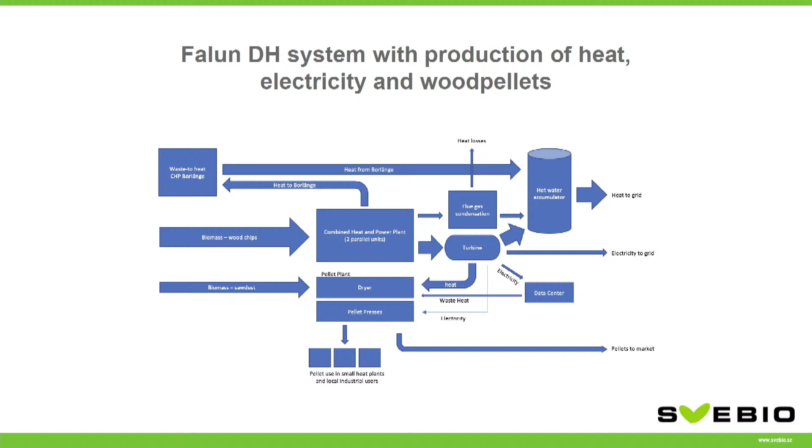This is a chart of the system. They actually also work together with another city, Borlänge, about 20 kilometers away and about the same size. Borlänge has a waste-to-energy plant where they use municipal waste. So they take the base load from there, and then they run the CHP in Falun during the winter months.

And to produce electricity, of course, and also from the dryers they use heat here for the dryers in the pellet plant. So they produce pellets for the community, electricity, and heat. And of course they have a hot water accumulator too, which almost every district heating system in Sweden has today, to be able to level out the demand and also produce more electricity when the price is high, directing it towards the accumulator, not only towards the district heating grid. So that's a good example of how you can adapt the district heating system to higher flexibility.

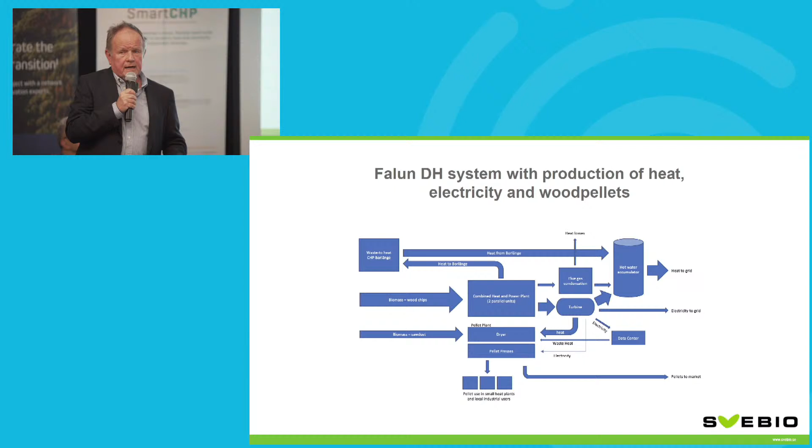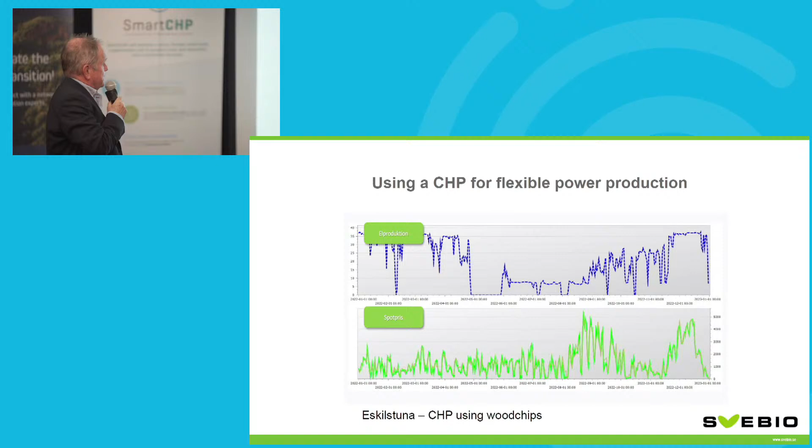So this is of course a possibility also for a CHP to run to follow the demand on the market, based mainly on prices. But it isn't, as this shows, just as simple as producing when it's a high price - you also have to have enough fuel. Sorry, I think my argument was wrong here. My argument would be that in this case they also need to produce heat, otherwise they wouldn't run the CHP. So later on, they also had enough heat demand, and then they ran the CHP.

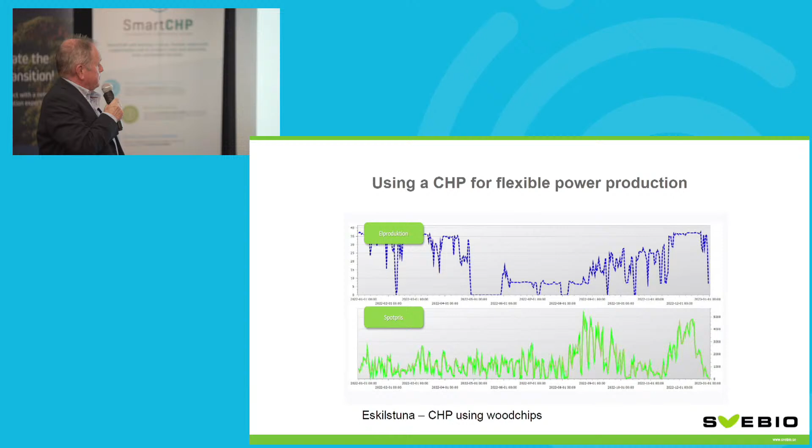Interest in small-scale bio-CHP: we had a conference a few days ago, Svebio in Karlstad, and we talked a bit about this. These are the arguments I already talked about - the reason why we have this interest in small-scale CHP, from 50 kilowatts up to 5 megawatts. That's the span I talk about. The high electricity and gas prices, the current prices, but also the expected higher prices.

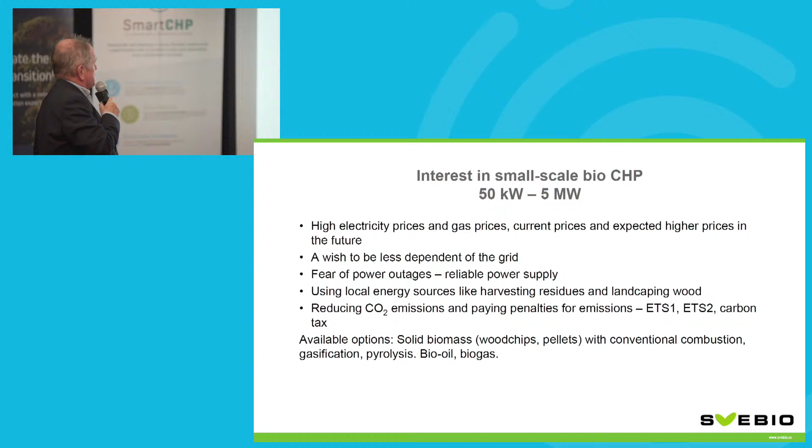And then there is a wish, which I think is important, to be less dependent on the grid. We have heard a lot of people contact us and ask what kind of technologies are there on the market. One typical example is large-scale farmers who need electricity for their animal husbandry and all kinds of equipment, and they are afraid of being so dependent on the grid, both for price and for delivery. So there is a fear of power outages, and they need a reliable power supply. There are many other examples of industries and others who can use that. There is also a growing interest in using local energy sources, like harvesting residues and landscaping wood or whatever.

This is also connected to the more difficult security situation we have in Northern Europe, with a threat of disruptions because of political developments. So we want to be self-reliant, and people locally want that too. We also have a problem at certain points getting enough effect in the grids into certain cities. Then, of course, we have the CO2 emissions. I talked about that before, that ETS2 can also be a driver here in the coming years.

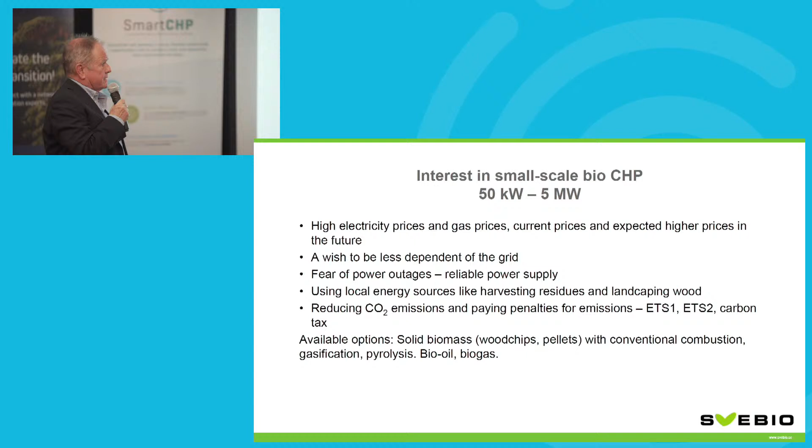So the available options we have are either to use solid biomass, wood chips or pellets with conventional combustion - that's the traditional way. Then we have gasification, we have pyrolysis, we have bio-oils. No one has talked about conventional bio-oils, but of course we can. We have millions of hectares where we could grow rapeseed in Europe, particularly in Ukraine. And we have biogas, as I talked about before.

This is an example of a more simple technology, just to tease you a little bit, which uses just a regular combustion unit and a simple steam boiler, and you don't get more than 15% electricity maybe. But in this case, this company, VEÅ, is selling this simple system particularly to sawmills, because sawmills need an awful lot of heat for dryers to dry the wood. So they don't care if they only get 15% electricity and 85% heat, because they need the heat. But they also need some electricity for their saws and machinery. So this may be a perfect solution for them.

But if you come and sell them something too complicated, and start telling them they have to use such and such machine together with another machine and so forth, they're just going to say, forget it. I want something simple that I can rely on, that my guy here can take care of every day without it being too complicated.

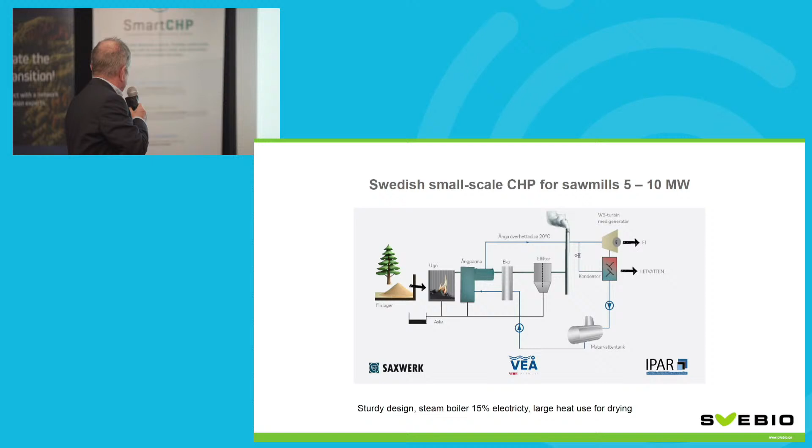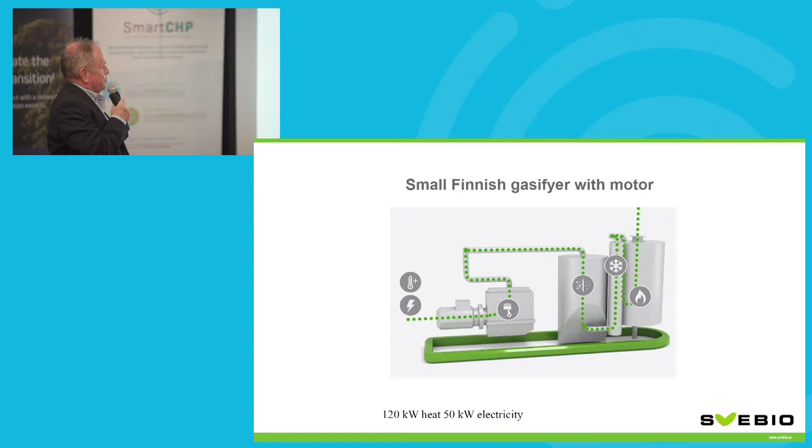Yeah, I only have one slide left. This is another one - a little Finnish gasifier. It's only 50 kilowatts electricity, but it's also working with a gas motor. They run this motor with gas produced in this little unit. We've all been a little wary of this one because they didn't do so well a few years ago on the market - they didn't work so well, but they sold a lot of them in Japan. So maybe they've improved it, so it's working today rather well. That was my last picture. Okay, thank you.

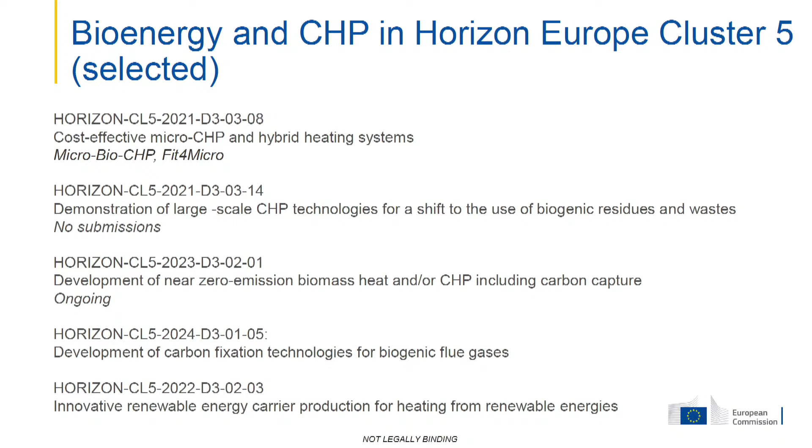There's an ongoing project on cost-effective micro-CHP and hybrid heating systems. We had a topic open on demonstration of large-scale CHP technologies, where there was no submission in that area. Then ongoing is the evaluation of the topic on development of near-zero emission biomass heat or CHP, including carbon capture, and the forthcoming development of carbon fixation technologies for biogenic flue gases.

So we are not only looking at the core of CHP technologies, but we also have innovative renewable energy carrier production for heating from renewable energies. So we have topics more downstream or upstream of the value chain, which are interesting for you. And please also look out of the box in other areas of Horizon Europe if you find something of interest.

With this, thank you very much for your attention.

Thank you very much, Thomas. I think we can take a few questions, if any. Yes, please, Bert.

If you go one slide back, do you have an example of the last one? What is meant there? I didn't bring the topic text with me, but I think it is the integration of other renewable energies also, so it's not strictly a biomass focus alone, but feeding in other elements. We have to look at the topic text, I didn't bring it, and I don't want to misrepresent the details. But please look at the topic. In general, we have quite some classical topics really on the bioenergy area, but we also have topics really combining, in the spirit of energy system integration.